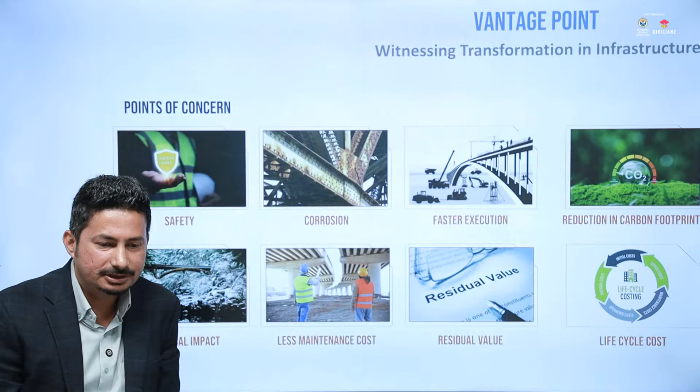So going ahead, as we speak, these are very interesting times where we are sitting at a vantage point, where there are a lot of developments happening. A lot of topics are being associated with infrastructure, such as how we can reduce the carbon footprints, what will be the life cycle costing of the project. We are talking about the residual value of the project.

We are talking about corrosion, faster execution, less maintenance. So all of these aspects put together are making infrastructure development right now very, very critical. And if you put all of these points together in a basket, there is always a solution in choosing the right metal, choosing the right material for construction of various parts of the infrastructure.

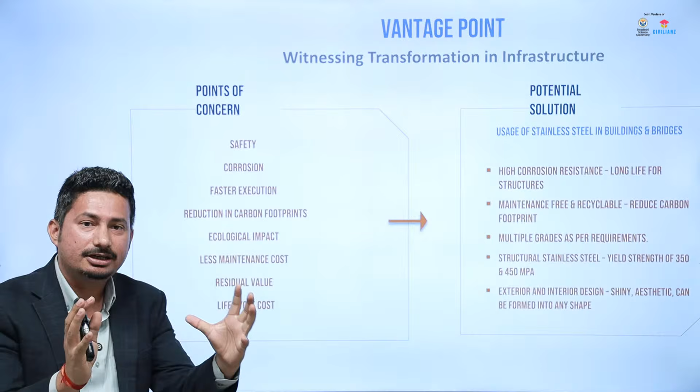So today we will be focusing a lot on the majority of the construction that takes place in infrastructure, in bridges, girders, etc. That is steel, and the same goes in buildings, etc. So we will talk a lot about how stainless steel can contribute to all of these points of concern that we have discussed.

So as we go ahead, as a designer, as an engineer, and a lot of people listening to us today are engineers, these are some of the main points you see on the screen before you choose any metal or any material for construction. First of all, you understand the strength of the material, the corrosion resistance, the fire resistance, and a lot of other aspects. Then the formability of the material, and then we decide the material for construction. So today in my talk we will talk about all of these points.

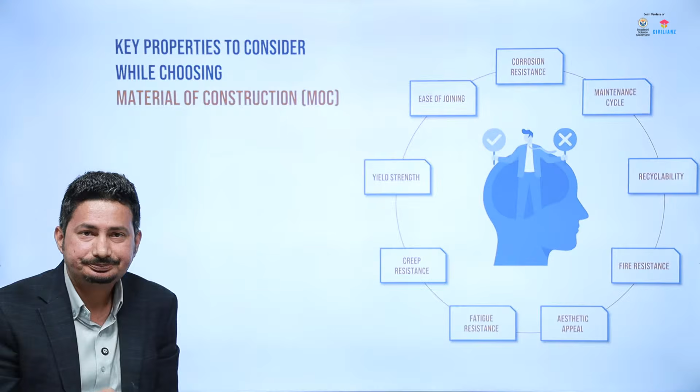First, addressing the corrosion resistance. That is one of the key challenges, as in India close to 5 to 7% of India's GDP is spent on corrosion maintenance, on maintaining the projects to resist corrosion. And even after that, there have been various incidents wherein failures have happened due to corrosion, which have not only caused financial losses but also resulted in loss of lives. With safety as a cornerstone, corrosion resistance is very, very important.

And there is a corrosion map of India. CECRI have given us a map which clearly defines the extreme severe zones and moderate zones. However, it has been focused only on the vicinity of the ocean. But there are various other criteria we have to focus on when we talk about corrosion. First of all, the vicinity to the ocean, that is one.

Then industrial pollution is causing a lot of corrosion problems across cities, even those away from the ocean. Wet and dry cycles, changing weather patterns, unplanned exposure to water due to floods, unpredictable rainfall. Then temperature fluctuations, even in hilly areas where wet and dry cycles are pretty often, corrosion happens quite prominently. So let's look at corrosion resistance from a holistic perspective and not just the vicinity of the ocean, and based on that, as engineers, we have to take a decision for selection of materials.

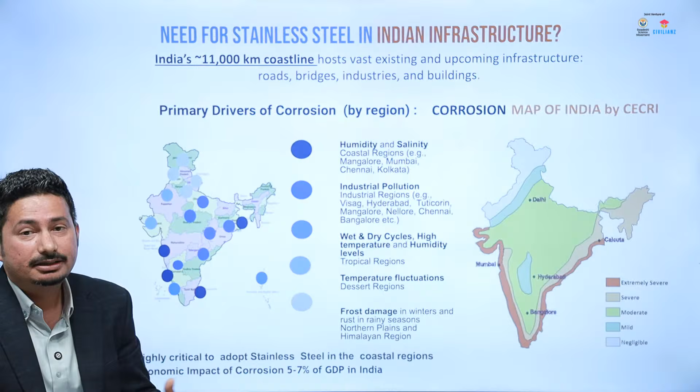Then, we are in Kerala. Kerala enjoys both. On one side, it enjoys a very vast coastline. On the other side, there are hills. It's a beautiful landscape. At the same time, it also calls for carefully choosing the material of construction, because of the vicinity of the ocean, as well as the hilly area's wet and dry cycles and temperature fluctuations.

Going forward, we talked about corrosion. Now, how does stainless steel per se provide corrosion resistance? It is very interesting to know that a minimum of 10.5% chromium should be there to call it stainless steel. At the molecular level, this chromium by nature creates a chromium oxide layer at the top, about 2 to 3 nanometers thick, a natural layer always created on top of any stainless steel product. Because the chromium is at a molecular level, when we cut it or machine it, this chromium oxide layer is automatically created again, always protecting the base material from the atmosphere. Therefore, it prevents corrosion.

Now, the same phenomenon in mild steel or any material other than stainless steel is achieved by artificially coating it with primer, top coat, metallization, etc. One thing to note is that this is artificially done, and all of these coats are sacrificial in nature. Therefore, maintenance is done periodically based on the location. After a few years, painting has to be done again, because that coating sacrifices itself to protect the material.

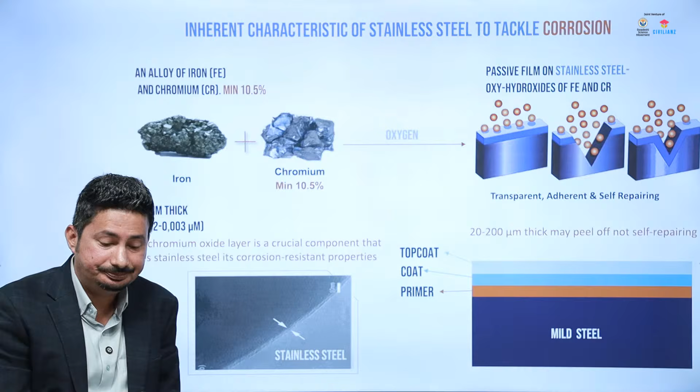For that matter, the grades and thicknesses which will be used will be more than 3 mm. 3 mm till 80 thicknesses are available in India now in multiple grades. We will talk about all these grades as we go ahead. And then there are various tubular sections which are available. Checkered plates in stainless steel for various walkways are available. Stainless steel rebars, and also built-up section girders and various forms which we can fabricate and provide. So we'll talk about all of these as we go ahead.

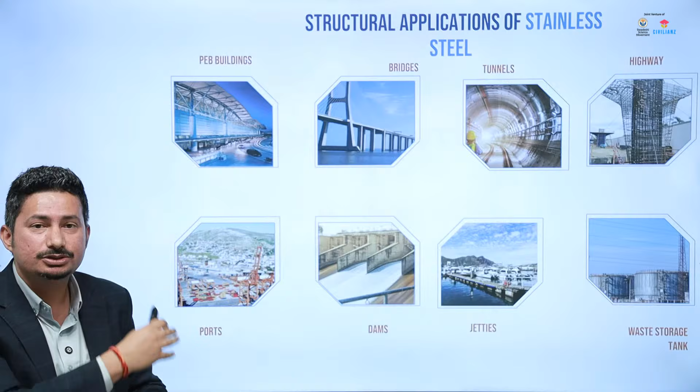So the application of these are in bridges, in buildings, in highways, ports, jetties. All of these different types of products are used in all of these applications, which are very prone to corrosion. Also, stainless steel is very prominently used for facade application, for exterior design, interior design, and as we go ahead, we'll talk about these applications as well today. Now, first, let's take the topic of rebar, which as civil engineers, it's very important to understand.

Now, before we get into the subject, let me take a case study. This case study is for the Progreso Pier. Progreso Pier is in Mexico. In that screen, if you will see, there are two jetties, two piers. The right hand side pier was built in 1941, and in 1941 stainless steel rebars were used. Then the other pier on the left hand side was built in 1969, and that pier did not have these

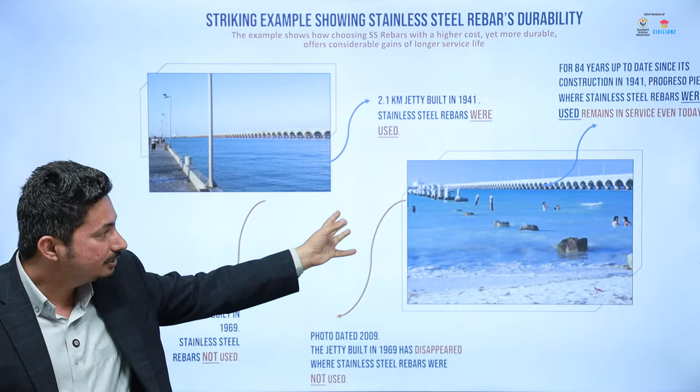stainless steel rebars. Now, these photos were taken in the 2009 time frame, and still the pier which used stainless steel rebar exists, still performing pretty well. And the pier which was constructed later, which did not use stainless steel rebar, vanished away. There has been a lot of research done on it, and ultimately what was found is that the usage of stainless steel rebar has really helped in increasing the longevity of the pier.

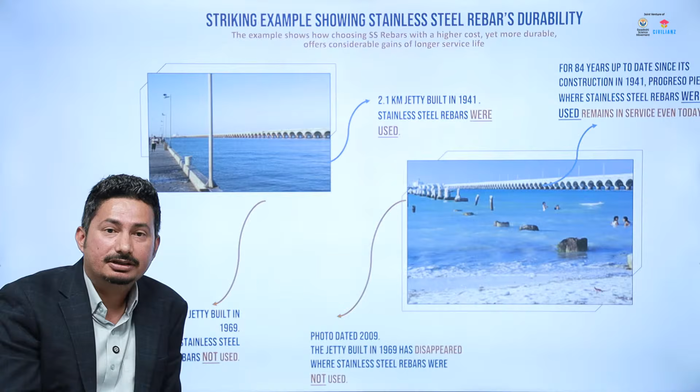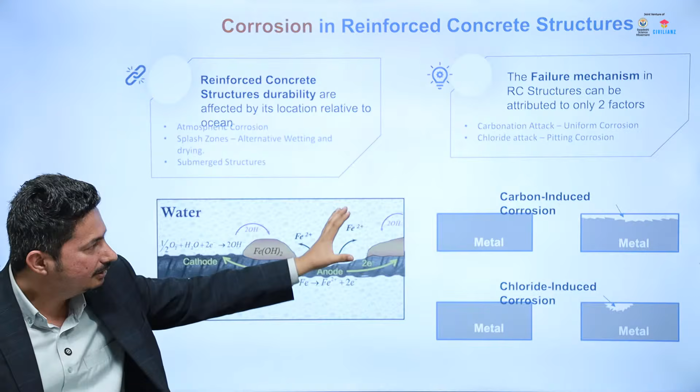Now, why did that happen? Because, as we will see in the upcoming slide also, after corrosion in rebar, the concrete will fall off. That action is not happening because the rebar will not corrode. Therefore, the longevity of civil structures really increases if we use stainless steel rebars. Now, let's take the kind of corrosion that happens in concrete. Primarily, carbon-induced corrosion and chloride-induced corrosion. The anode and cathode generation will happen, then material loss will happen, and therefore corrosion will happen. So, primarily, these are the two types: carbon-induced corrosion and chloride-induced corrosion.

Now, in the carbonation method, generally what happens is that with the formation of carbonic acid, the top surface every year, bit by bit, the carbonation of the concrete will happen, and mostly the first cover of the rebars will generally get affected because of the carbonation. This test is called the phenolphthalein test, in which the pink colored area you see is not carbonated yet, and the colorless area is carbonated already, and that happens with the age of the concrete.

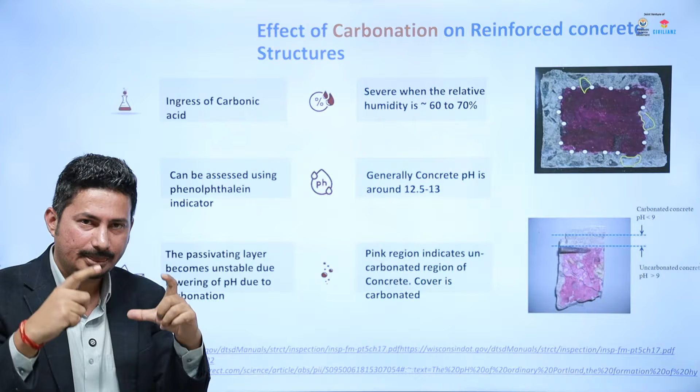And here the workmanship, the type of concrete that we are using, plays a very, very critical role to prevent carbonation. And also, to resolve that problem, we can use stainless steel rebars. Even if carbonation happens because of the circumstances where the project is located, this particular layer, the rebars, will not corrode by using stainless steel rebar.

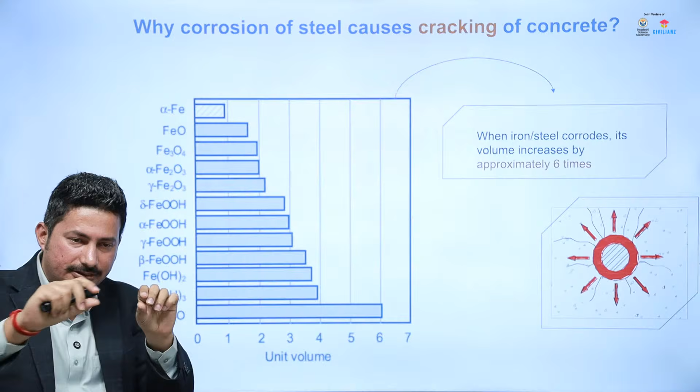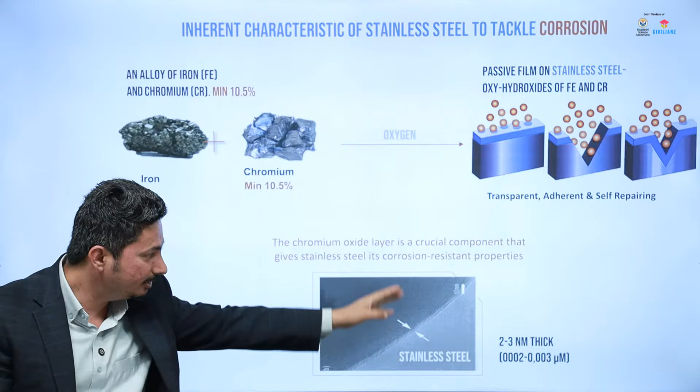Stainless steel will prevent corrosion by creating a boundary between the base material and the environment through a chromium oxide layer. This is the basic fundamental of corrosion prevention, and that's how it will help the structure as well. Looking at all this, an Indian standard has been formed, called IS 16651, primarily for structural stainless steel rebar.

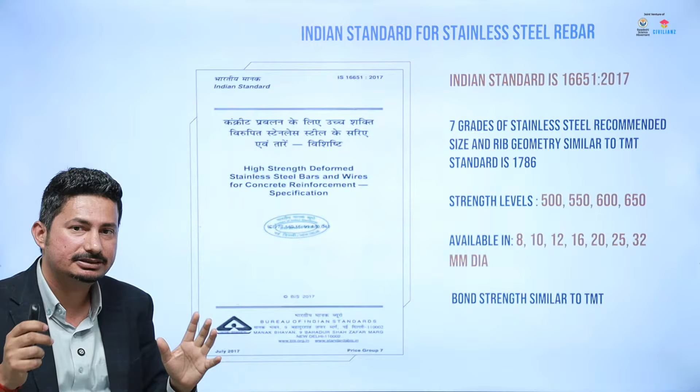In this, there are 7 grades of stainless steel which have been recommended. The strength levels of 500, 550, 600, 650, which are at par with TMT rebars, are provided. All diameters from 8 mm to 32 mm have been provided. So the BIS code is already in place where stainless steel rebar is incorporated. In these 7 grades, there is even the 410L, which is widely used in India right now.

Even in that, chromium is 11 to 13.5%. Remember, chromium creates the chromium oxide layer, so a minimum of 10.5% is required. In this, 11 to 13.5% is available, and it goes up to 22, 24% levels. Based on the vicinity and the corrosion resistance we need, we can choose which rebar material we should choose.

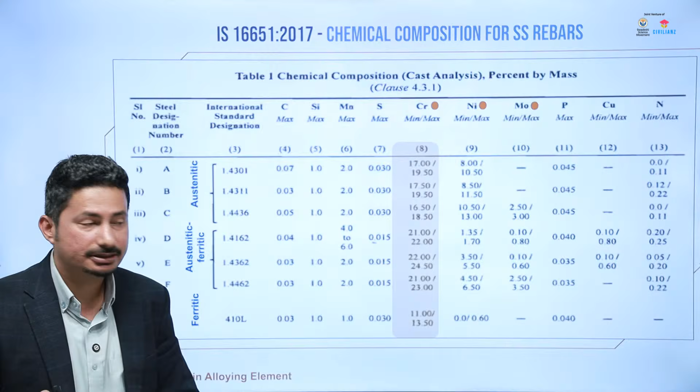At the same time, this standard also defines the different strength levels of stainless steel rebar. Remember, in TMT rebars, we have 500, 550, 600, 650 strengths. The same strengths are available in stainless steel rebar. Elongation of 14.5 with 550 is the most common combination being used. In addition, 650 and 500 with 16 and 10% elongation are also available.

So the question arises, how about compatibility with concrete? Compatibility with concrete depends on a couple of reasons. One reason is the rib structure. The rib structure of stainless steel rebars, as per the standard, is at par with existing TMT rebar, so the pull-out strength and everything is the same.

And there is one more misnomer, that stainless steel is always shiny. Stainless steel is not always shiny; the shine comes from a process. When stainless steel is hot rolled and comes from the mill, it is not shiny. It undergoes a process and then becomes shiny. So these rebars are not shiny handrail-type rebars. They are grayish, rough rebars. It looks just like TMT, only with a grayish tinge.

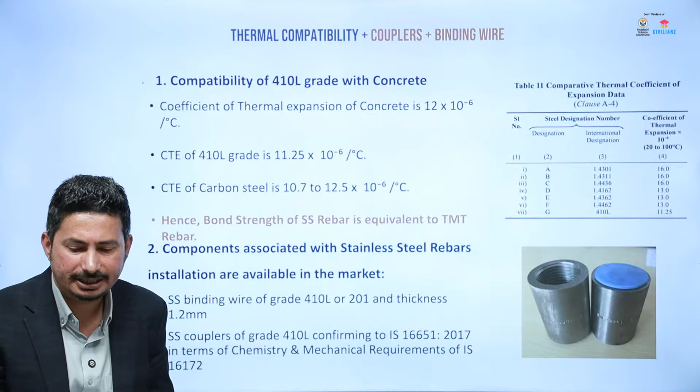Going forward, the acceptance of stainless steel rebar in the industry is rapidly increasing, and it has been in the market for quite some time. Since 2018 and 2019, there have been certain policies by railways to use stainless steel rebar. Local policies by various railway zones have also been created. The MoRTH has also come out with a policy in 2021 and again in 2024 to use stainless steel rebar for all coastal belt projects within 15 kilometers of the coastline, and railways say within 30 kilometers of the coastline stainless steel rebar may be used.

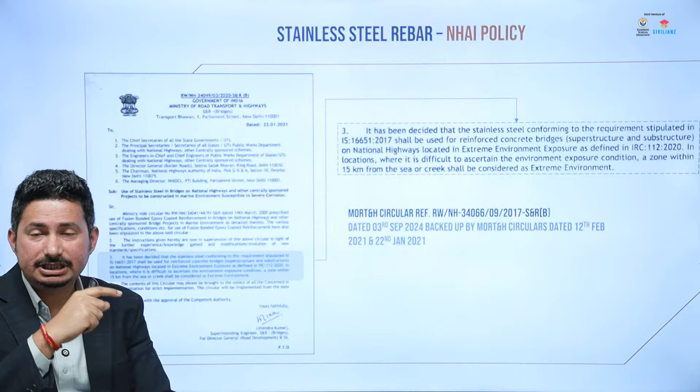And the MoRTH policy says within 15 kilometers of the coastline stainless steel rebar shall be used. So there are various policies in place, which also shows the acceptance of stainless steel rebar in the market, and people are benefiting from it.

There are various other options like coated rebars, TMT rebars, CRS rebars in the market. How does stainless steel rebar perform, and how can we compare? We have a couple of slides where we can understand how to compare stainless steel rebar with the other possible options. For example, first is coated rebar. The coated rebars are epoxy coated rebars and GI coated rebars.

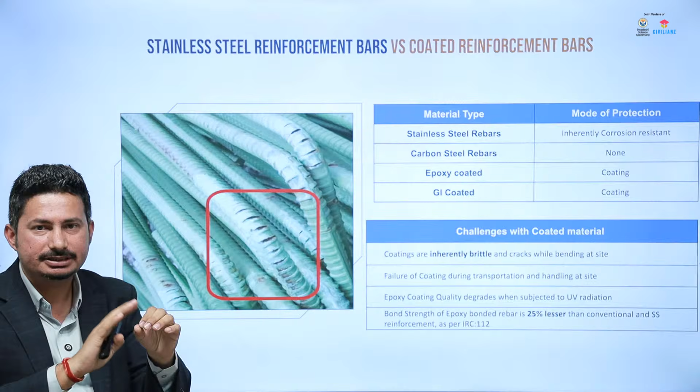We have to understand that all these coated rebars are made straight in the factory. The moment we bring them to the site, the first thing is we have to cut them. The moment we cut the rebars, the surface gets exposed. The second operation is bending. The moment we bend them, cracks will develop because the coating will crack. Therefore, the efficacy of coatings will not be better. And with cracks developing in the coating, accelerated corrosion happens in these concentrated areas, which is even worse than uniform corrosion.

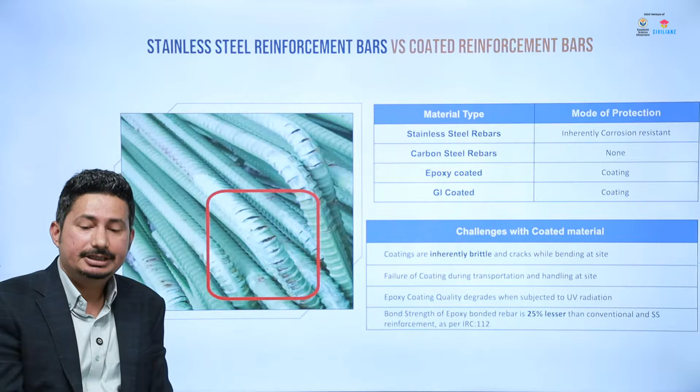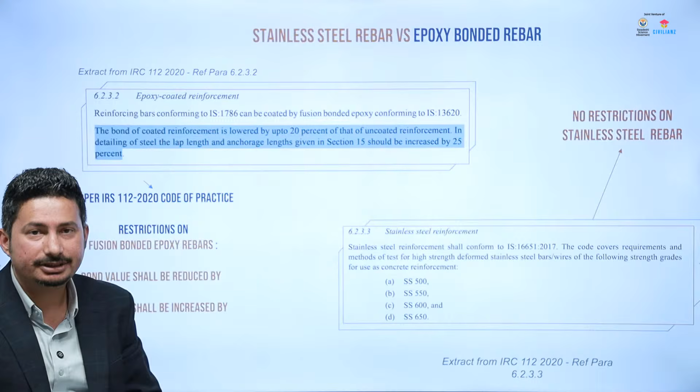If we understand from the IRC 112 conditions, it very clearly states that the strength levels, the bond strength levels, and the lap value have to be increased when we are going for epoxy coated rebars. So that also shows extra material will be used if you are going for epoxy coated rebars. For stainless steel rebar and TMT rebar, such conditions are not in place.

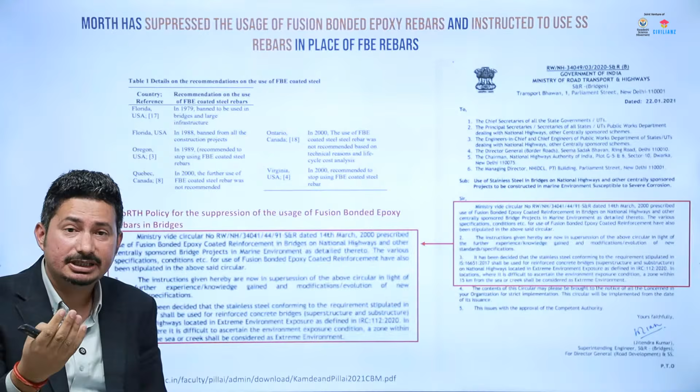Talking about various countries, many have already started moving away from epoxy coated rebars for certain applications, primarily because of these reasons. The coating breaks at site. Then we also have to increase the material requirement because the bond strength will not be as per TMT or as per stainless steel rebars.

Looking at it even more, the Ministry of Road Transport and Highways has also released certain policies where they have mentioned that epoxy coated rebar usage shall be suppressed and limited. So these are some of the comparisons.

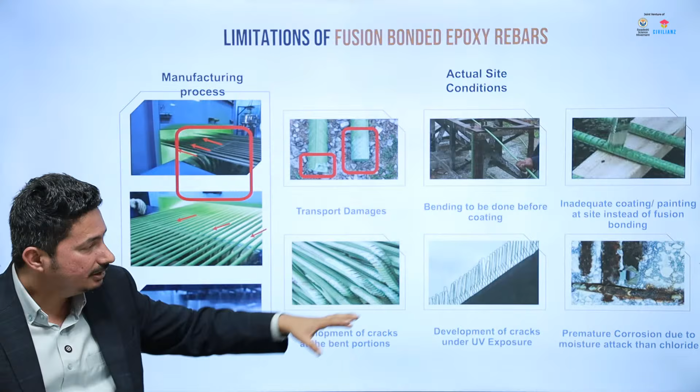This is one photograph showing how epoxy coated rebars are made. Once we cut them at site, these sides will be exposed. Then we bend it, and after bending, this is how it looks. So there are various reasons why this is a comparison with respect to epoxy coated rebar.

As we discussed in the previous slides, when we talk about stainless steel rebar, minimum 10.5% chromium should be there. So the chemistry itself is so different that CRS rebar has only 0.4% of corrosion resistant element, and chromium in it is mostly 0.02% or so. Because of this, the real efficacy against corrosion may not happen due to the very limited chemical corrosion resistant element present. Whereas in stainless steel rebar, minimum 11 to 13.5% chromium is present, so obviously the corrosion resistance capability of stainless steel rebar is much higher than CRS rebar.

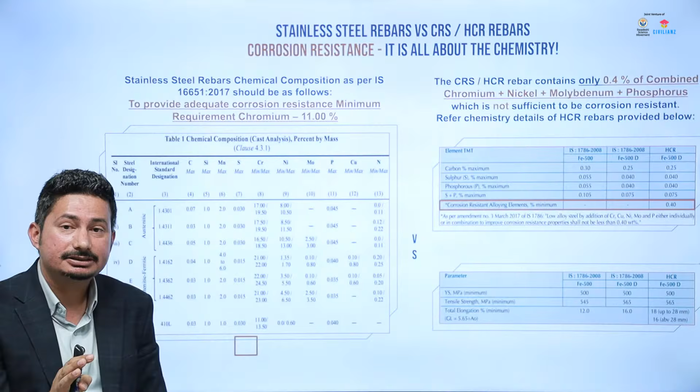So generally consultants have this notion that when corrosion resistance is a criteria to choose a rebar, most consultants go for stainless steel rebar.

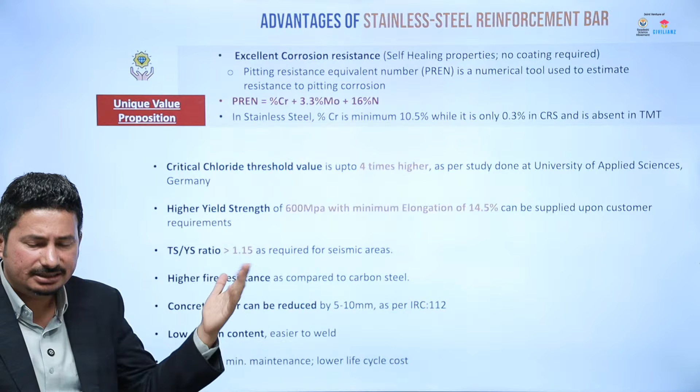There are various benefits of using stainless steel rebars. For example, IRC 112 says we can reduce the concrete cover by 5 mm, among various other reasons discussed in the slides above. This is IRC 112, which clearly says 5 mm of concrete cover can be reduced if you are going for stainless steel rebar.

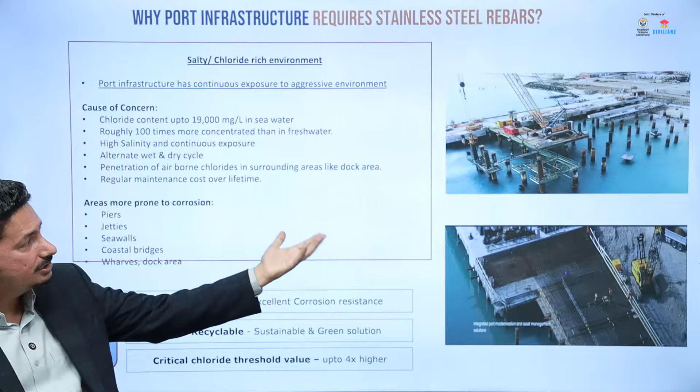Now talking about some applications, first is port structures. Port structures, as we all know, are highly exposed to the marine environment, and chloride-induced corrosion is very prevalent there. Therefore, using stainless steel rebar makes a lot of sense. The PREN value, the pitting resistance equivalent number of the rebars, is much higher compared to CRS or TMT rebars, as discussed in the previous slides. So the structures will last longer if using stainless steel rebars.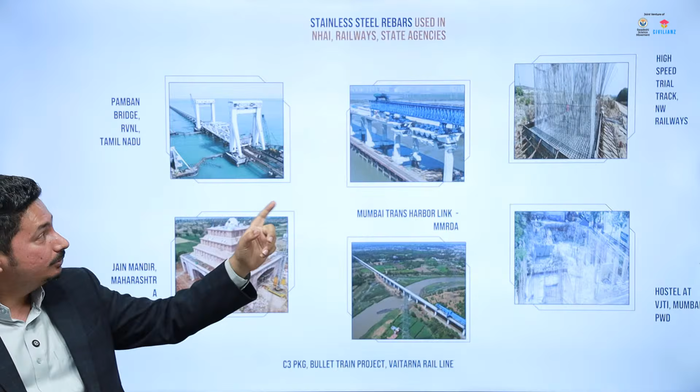A couple of examples: in Pamban Bridge, stainless steel rebars have been used. In Mumbai Trans Harbour Link, it has been used. In bullet trains and high-speed rail tracks, stainless steel rebars are being used. Not just on bridge projects, but also in infrastructure like hostels, mandirs, and buildings, stainless steel rebars are being widely used.

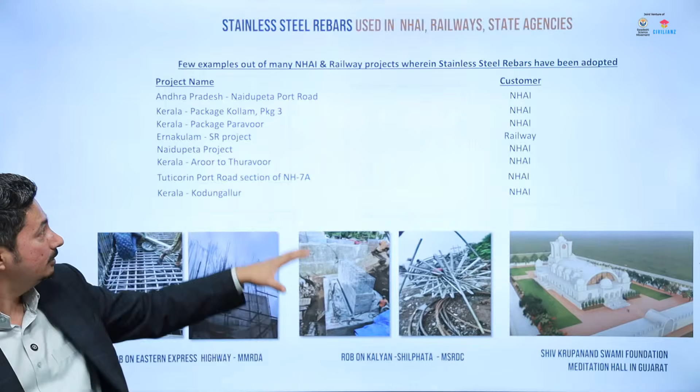Some more examples: in Kerala, where we are sitting, there are a lot of projects already using stainless steel rebars. That's a very good sign, and it shows that these projects are getting benefited by using this.

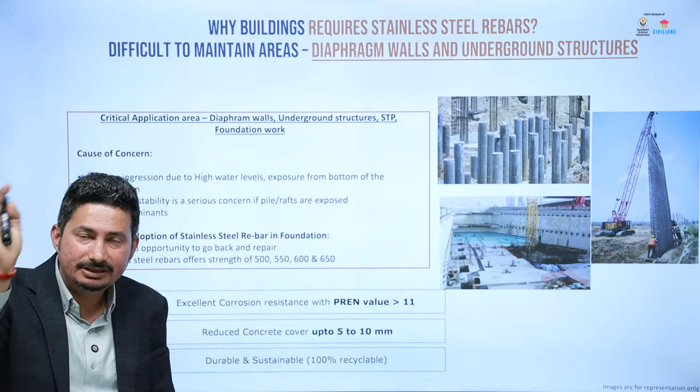Now talking about buildings, there is one important aspect. In buildings, we can always see diaphragm wall and retaining wall structures, and even walls exposed to pollution—in all these places, stainless steel rebar can be used.

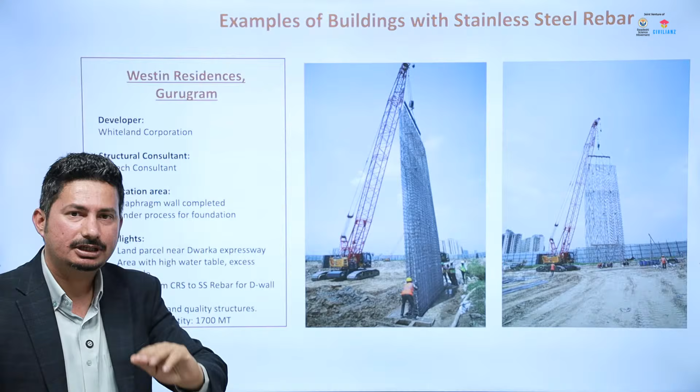So this is one example where diaphragm walls or retaining walls of a building are using stainless steel rebar. Based on studies, earlier CRS rebar was being used, but because of high underground water level, and because it's highly corrosive being near a polluted lake, CRS was not performing well since it has very limited chemistry. Therefore, builders have now moved to stainless steel rebars and are benefiting from the same.

There are various other examples. Now let's move ahead, we have other topics to cover. Let's talk about usage of - so far we have discussed rebars, now let's move toward plates.

Plates are used in bridges and in buildings. Plates can be transformed into various shapes - we can make built up sections, provide checkered plates, or roll them into pipes and tubular sections. All of these plates can be used for girders, for building applications, for bridge applications, etc.

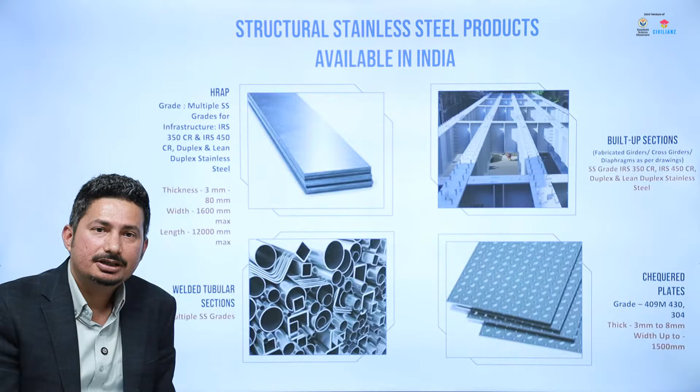It may cost a little higher, but over the life cycle of the project, the maintenance cost drastically comes down. So here comes into picture the life cycle costing of the project - when we look from that aspect, stainless steel provides much better solutions.

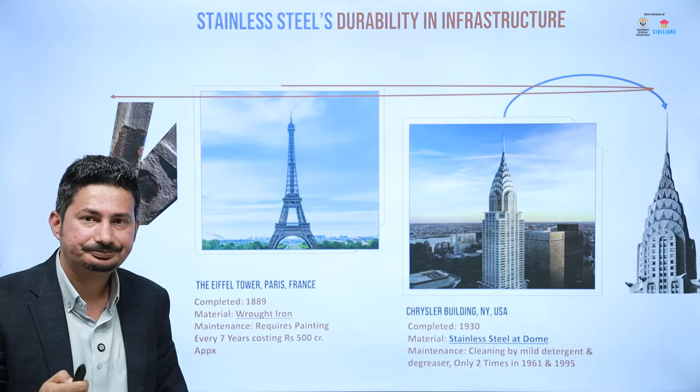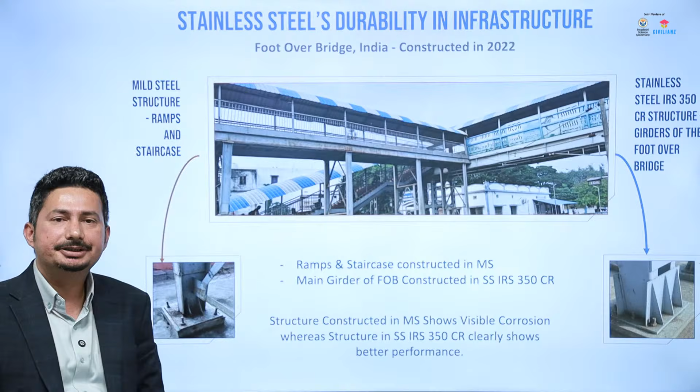We talked about this - mainly chromium provides corrosion resistance, and we'll talk about these applications as we go ahead. Now let's talk about a very important topic: the various grades available in stainless steel. Mostly there are three families of stainless steel used for infrastructure applications.

One is the ferritic family, called grade 400 series. Grade 400 series interestingly has high strength levels - yield strength can be 350 MPa and 450 MPa, and these can be used for making girders, buildings, beams, columns. At the same time, the cost of ferritic grades is much lower compared to other grades. Then comes the duplex.

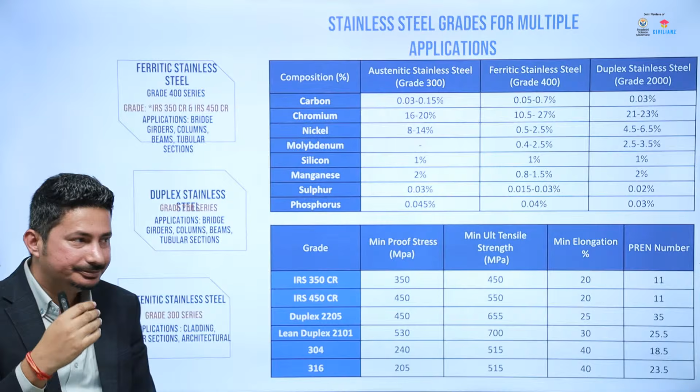Duplex is the highest category of stainless steel in terms of infrastructure. It has very rich chemistry, so it can be exposed to the ocean and nothing will happen to it. It also has very high yield strength and tensile strength, so it can be used for all structural applications. Then there are the commonly known austenitic grades, 304 and 316.

These are mostly used for aesthetic applications because the yield strength is about 205 MPa. Because of that, they cannot be used for structural applications, whereas IRS 350 CR and IRS 450 CR are used for structural applications.

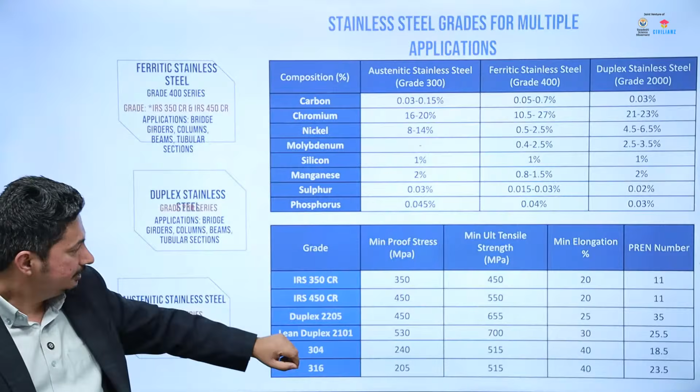There is also an interesting story about how the IRS 350 CR nomenclature came into being. IRS 350 CR means Indian Railway Standard - 350 is the yield strength, CR is the corrosion resistance. This was primarily designed for Indian Railways. In the 2015-16 timeframe, Indian Railways wanted to develop a stainless steel grade for structural application.

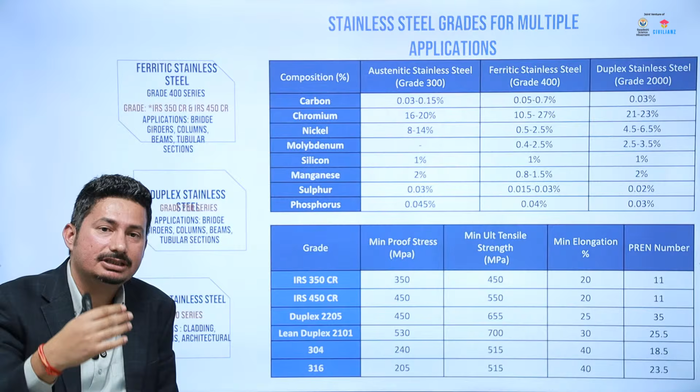There is a standard called ASTM A1010, globally recognized for stainless steel used in infrastructure with high strength. In India, it was developed by the Indian Stainless Steel Development Association, and so the IRS 350 CR came into being. Now it is being widely used by railways as well as non-railways - various municipal corporations, state highway departments - everyone has started using these.

Now, talking about corrosion resistance, there was a study done in South Africa where, across multiple locations, multiple types of materials were kept for testing.

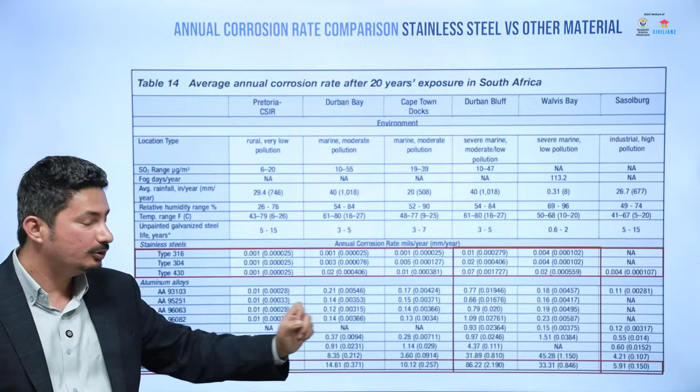Now, they saw annual corrosion rates in mils per year and millimeters per year. These three columns are stainless steel, and the last one is mild steel. If we compare, for example, severe marine and moderate low pollution in 430 grade stainless steel, it was 0.07 mils per year, whereas mild steel was 86.22 mils per year corrosion rate. That clearly defines the difference in corrosion. If you go for mild steel, it is multi-fold higher corrosion compared to stainless steel.

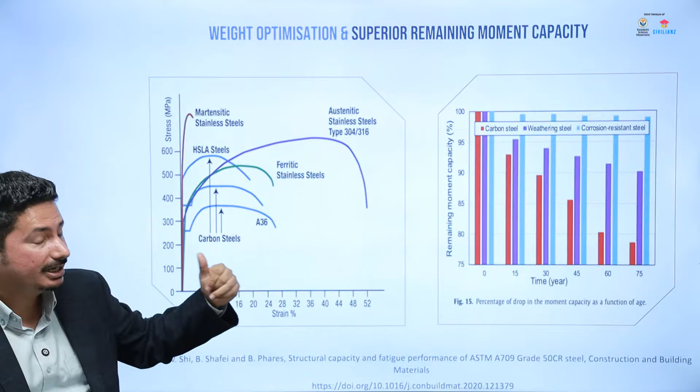Both on the stress strain curve as well as the remaining moment capacity, the stainless steel performs pretty well, and therefore in all seismic grade materials and seismic structures, using stainless steel makes more sense because of its higher ductility in nature.

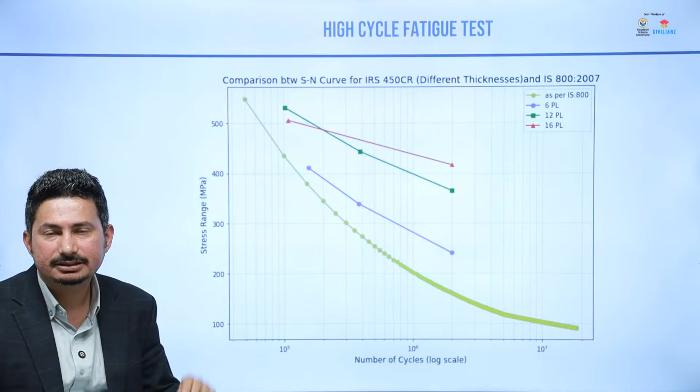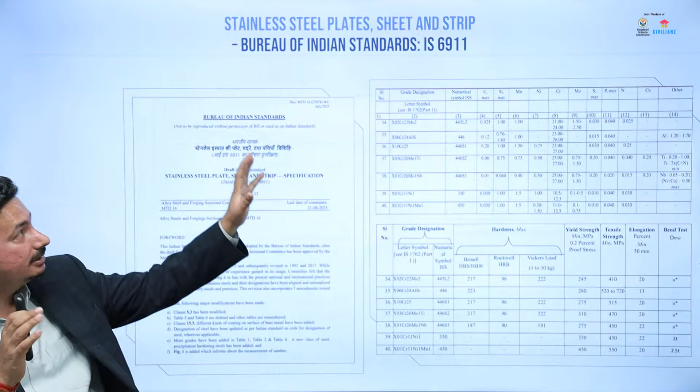Even IS 6911, which is the stainless steel standard, all these stainless steel grades which have to be selected are part of it. Even this high strength stainless steel has been incorporated in 6911, which can be used by the engineers.

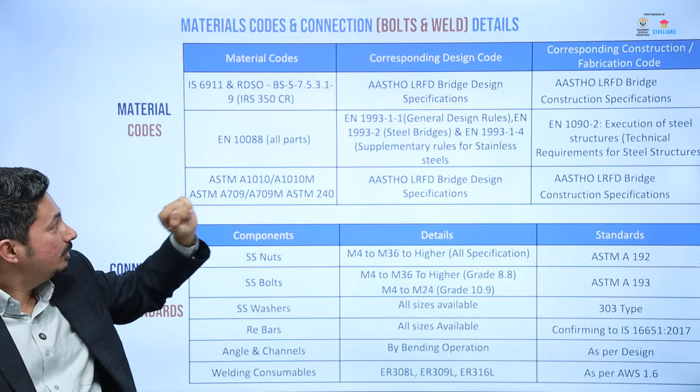Material code: Indian Railways has developed a material code of RDSO BS-S-7.5.3.1-9, and IS 6911 we discussed. Also, EN codes and ASTM codes are very well available for designing structures in stainless steel. Even IS 800 allows designing in stainless steel, and there is one more revision coming up for IS 800 where a new chapter for stainless steel will also be incorporated soon.

Then there are nuts and bolts and welding consumables. All of these standard nuts, bolts, and welding consumables are available in the Indian market and being widely used across.

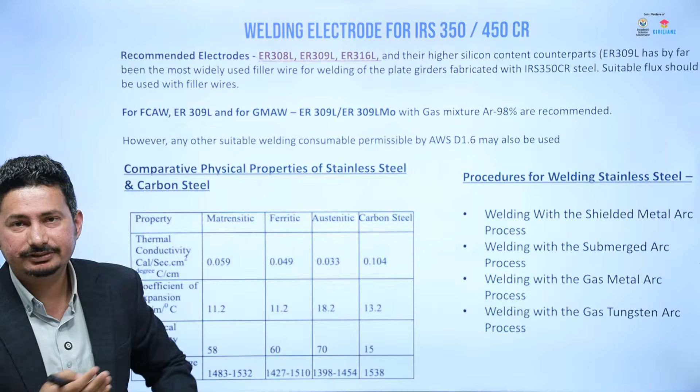When it comes to welding, generally we ask this question: if we are going for welding stainless steel, will it be very different? It's not very different. The same machine can be used, the same manpower can be used. Only the electrode changes. For example, to weld stainless steel, the grades of electrodes are 308L, 309L, and 316L, based on the different grades of stainless steel we use. The most commonly used welding electrode is 309L, and the same welding procedures will be used. Only heat input has to be controlled, and with minor training, the same person can weld using the same welding machines.

When we talk about infrastructure and structural applications, we are talking about high strength stainless steel grades. These examples are from IRS 350CR and IRS 450CR, which is a ferritic stainless steel grade having a yield strength of 350 MPa and 450 MPa. For example, all these footover bridges are made up of IRS 350CR stainless steel grade, and the structure between Vivekananda Rock and the Thiruvalluvar statue at Kanyakumari is made up of IRS 450CR.

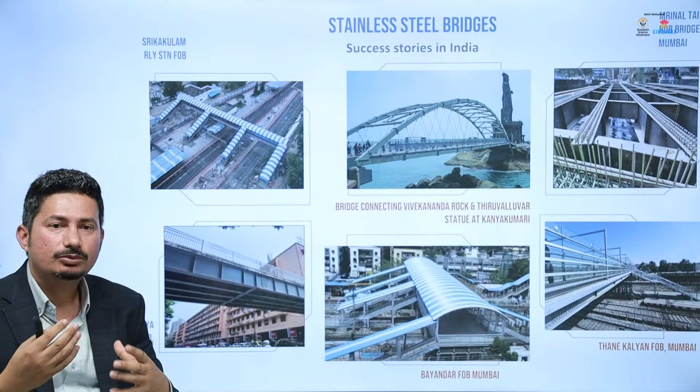Then that bridge at Mumbai, called Mrinal Tai FOB, is built from duplex stainless steel grade. So based on the location, we choose what kind of stainless steel has to be used, and what kind of strength requirements. As discussed in the first slide, multiple parameters decide, and then we choose the grade.

This is one of the iconic projects happening in India where these pylons are being made up of stainless steel. Here, IRS 450CR grade and IRS 350CR grade have been used for making the complete pylon.

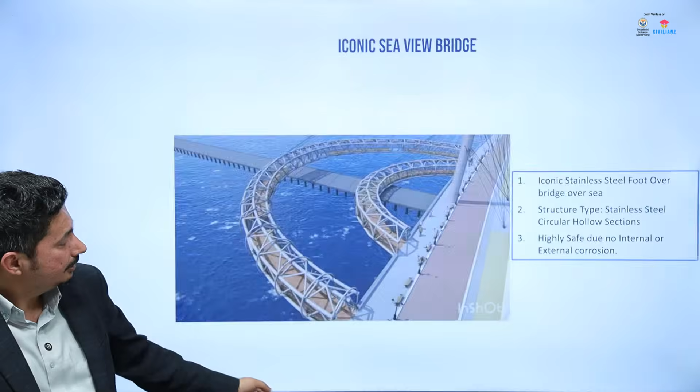It is all bolted in nature. Now, bolted bridges are becoming the first choice of clients, because first, it increases the speed of construction, as all these modular structures come at site and get bolted, so there is no site welding. There is a lacuna of site welding in that it affects the quality—at site, if something is getting welded, it results in bad quality. So both aspects, quality as well as faster execution, are being achieved by using all these bolted structures.

In this particular case, the highway department was asked to increase the navigation height to 4 meter. Now, if we go for a concrete bridge, the concrete bridge girder depth will be easily 2.5, 2.7 meter. If we have to maintain that and also provide the navigation at 4 meter, obviously we'll have to lift this entire girder up. And when we are lifting the entire girder up, then we have to provide the approach spans. Approach spans call for the land acquisition cost.

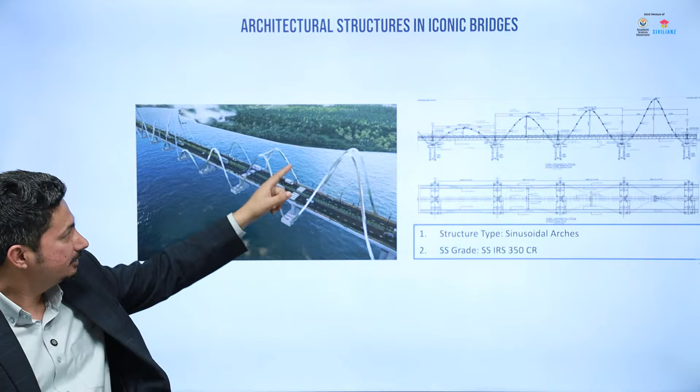Now going ahead, various architectural usage of the IRS 350 CR grade is also happening for big structures. For example, this is a bridge where this architectural sinusoidal wave-like structure is now being made up of IRS 350 CR.

The original choice was MS, mild steel, but then when it was noticed that all these rivers are getting polluted, and the maintenance will become a challenge during the life cycle of the bridge, then the consultant and the end clients moved toward IRS 350 CR.

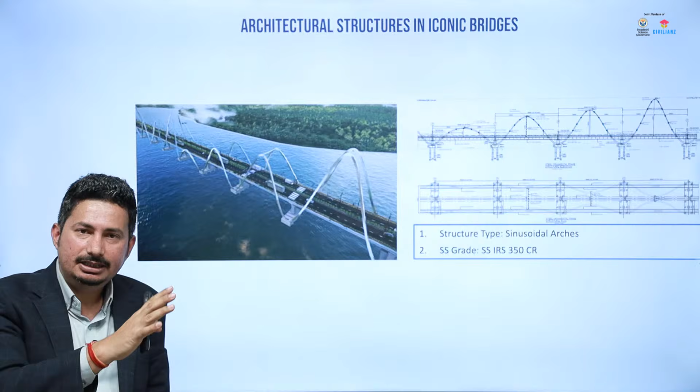Now the topmost structure is about 30-meter tall, so all of these areas will obviously become a challenge to maintain. Therefore, usage of structural stainless steel for this application is becoming more and more common from the maintenance aspect. So it provides you the aesthetic appeal, as well as it reduces the maintenance requirement.

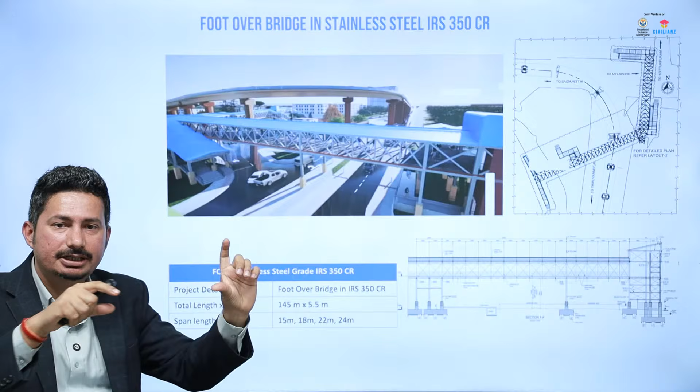Now when we talk about footover bridges, various footover bridges within the cities are coming up like these. And all these tubular sections are being produced in IRS 350 CR stainless steel grades. And with that, all these truss structures are being made in footover bridges across cities, and various footover bridges have been constructed like this.

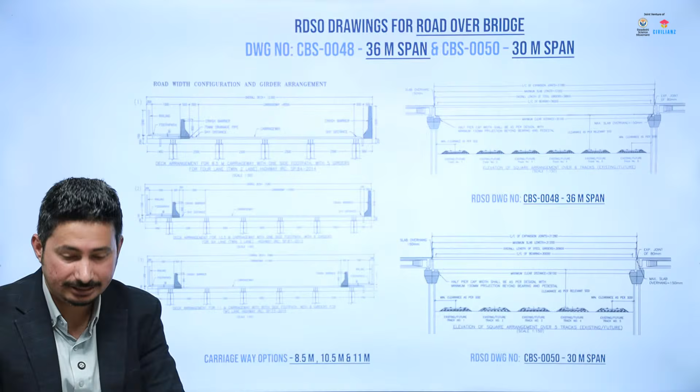RDSO has already released the standard drawings for road over bridges. In 36-meter and 30-meter span, RDSO has already released the material standard, as well as the drawings of the road over bridge stainless steel girders. Then talking about footover bridges, RDSO's footover bridge standard drawings are these. You can make a note of it, which is being widely used across Indian Railways now.

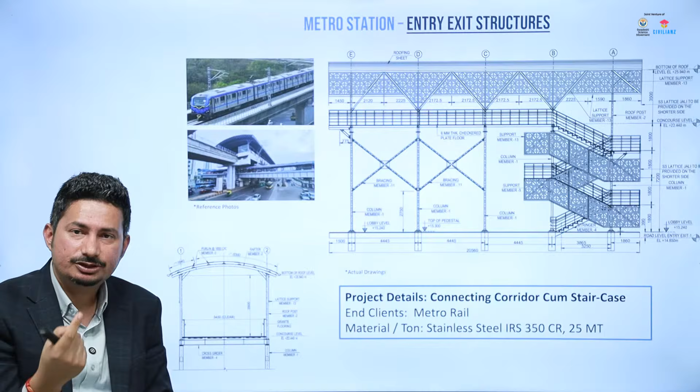Even metro entry exit structures for all the metro stations are also slowly getting built in IRS 350CR stainless steel grade, for two critical reasons. First, the execution is much faster when we compare to concrete. Bringing the concrete together and putting it together takes a lot of time. Making it in stainless steel IRS 350CR is much faster, and the longevity of the structure will be much higher.

Another reason: within cities now water venting height is being increased because in various cities like Chennai, even in Kerala, because of heavy rain, flooding happens, and in all of these cities the old network of drainage and nalas is there. Now all these old bridges are concrete bridges. The water level increases because of flood. The water doesn't vent out properly because of the greater depth of these concrete bridges, and because of that there is a need to rethink the bridge structure for all of these nalas.

And one such development is that semi through girder bridges have been designed in stainless steel IRS 450CR, and across cities now these are being executed, which reduces the depth of the overall bridge to only 775 mm instead of concrete girders which are about 1.5, 1.7 meter depth. Because of this, the water venting height is becoming better, and at the same time there is no need to provide approach spans in densely populated areas. So this is one critical solution for a very important problem within the cities.

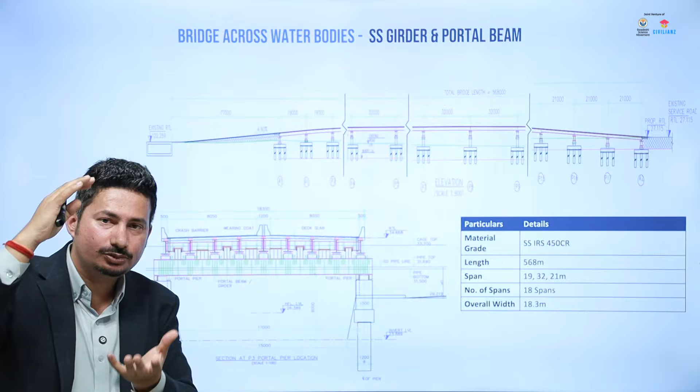Now, one more as a structural engineer, you will appreciate. Generally, what happens? All these bridges, composite bridges, only the girders are made up of steel or stainless steel. Now, in one such project, the girders are also composite, made up of stainless steel IRS 450CR, as well as the portal beam is made up of stainless steel. Now, what has happened is because of all this, the superstructure weight has reduced drastically. Now, when you reduce the superstructure weight drastically, first your execution time is reduced drastically.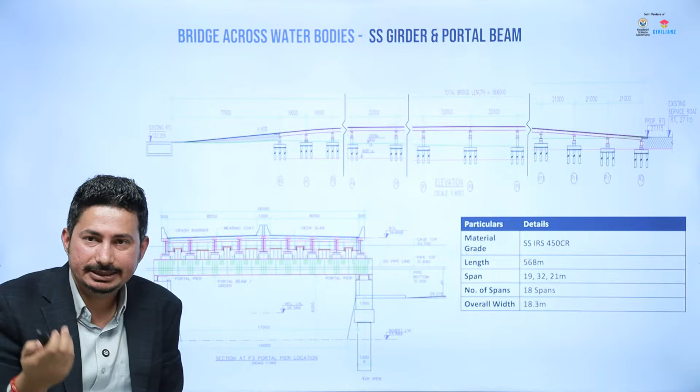Second is the piers become leaner. Even the benefit is felt for the piers and piling as well. So leaner superstructure, lighter superstructure will always result in leaner and lighter substructure as well. This is also becoming more and more important. So as designers, as engineers, you should also think about designing such bridges where the superstructure is much lighter.

So application of bridges we discussed. Now in buildings and statues, stainless steel is being used quite rampantly. For example, in the statue of Bhimrao Ambedkar, the core structure is made up of stainless steel, again because of the longevity aspect. On the Statue of Unity also, stainless steel rebar has been used. Amar Jyoti Stupam in Telangana, as well as in the building for New India Insurance in Chennai, the diagonal structure is made up of stainless steel.

Similarly, we talked about bridges. In buildings, we will talk about all these columns, beams, purlins. All of these can be transformed to stainless steel to increase the life. So structures along the port, which need longer life, can be made from that.

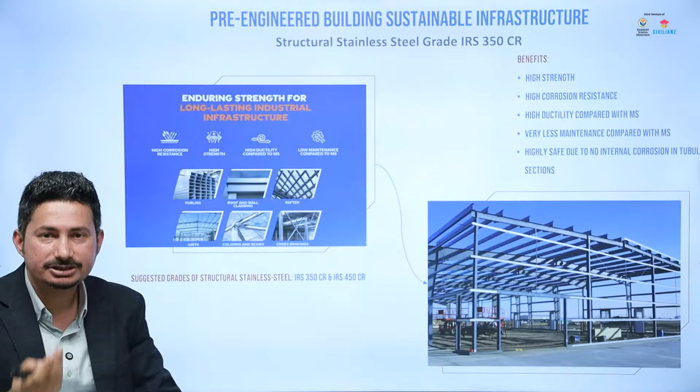Now, one critical aspect that we have to see is the corrosion that happens within the tubular structure. Within the tubular structure, there is corrosion because sometimes water seepage happens, and a lot of accidents. For example, in Delhi, at the airport, the beam collapsed because of the internal corrosion. Now, in stainless steel, that is one key benefit, that the internal corrosion will not happen. The structure will automatically become safer. So we talked about the application.

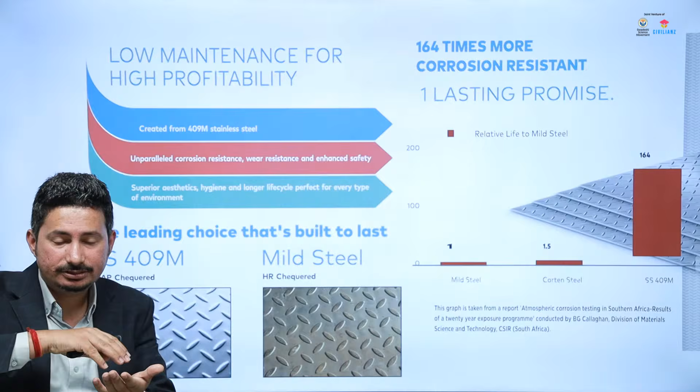Then let's talk about checkered plates. Various grades of checkered plates are available, which can again increase the life. Now one critical application is for railway bridges. In railway bridges now, stainless steel checkered plates of 409M and 430 are being widely used. What's happening there is all of these inspection platforms for railways and walkways are in remote places, so maintenance may not happen very often, and it always becomes a safety hazard.

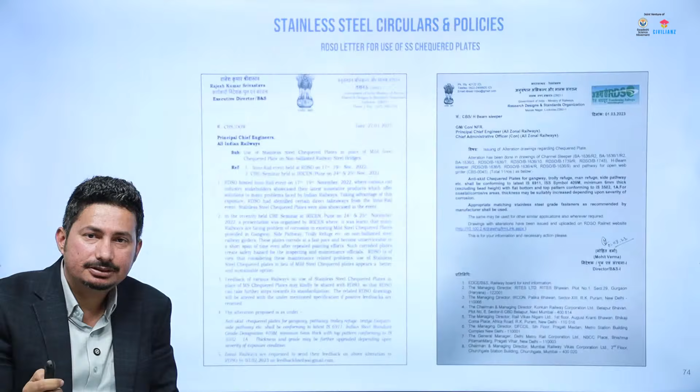Because of that, the railway has moved towards usage of stainless steel checker plates across India, and they are benefiting a lot from that. The thickness earlier for MS was 8 mm. Now in stainless steel it is only 6 mm. So these are the policies and various applications for railway bridges, for walkways; all across we can use checker plates. Even for the trucks which carry various types of transportation, we can use checker plates.

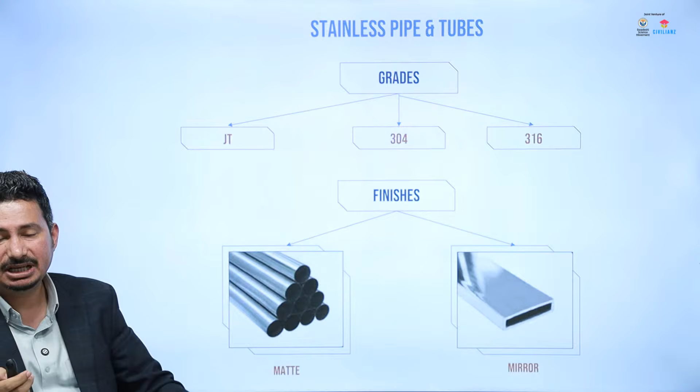Now pipe and tube, there are multiple grades of pipes and tubes available, 316, JT, 316, 304. The finishes are matte finish and mirror finish, which are available in the market. Then there is always a gap in the market to identify the quality of the product, which quality has been used. For that, various marking systems are being used. For example, the grade of the material, who is the make, who is the supplier of raw material, everything put together, a mark is put on the tubes.

And one such example is in Chennai, one of the stations has used it, and all of these numbers, all of these marks can be easily identified online. So it's very easy for the end customer to see whether the material received is authentic or not. That is one of the quality gaps in the market, which is being bridged by all this marking. One such marking is called Jindal Saathi Seal.

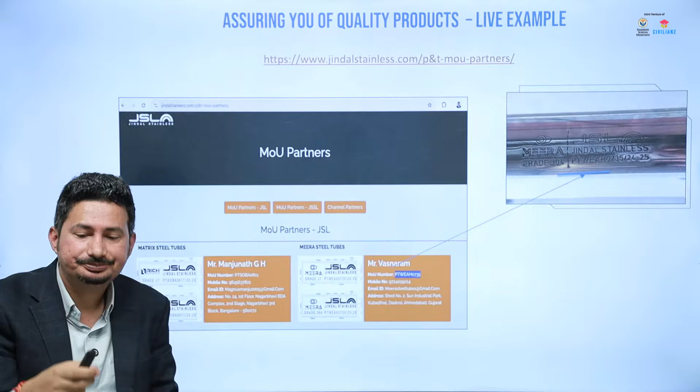So going forward, yeah, I'll now be quick on this.

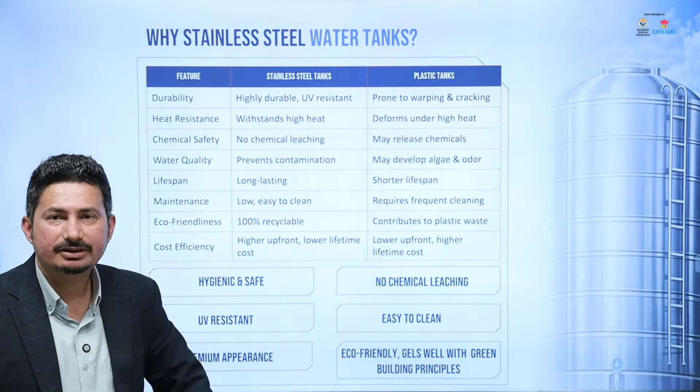There are water tank options available in stainless steel, which are being widely used for household applications now, and also mega 300 kiloliter and 500 kiloliter tanks are available in stainless steel. The grades are 304 and 316.

Now the key benefit of using stainless steel is, if you are going for a concrete tank of such a big structure, the algae formation inside is a health hazard, and maintenance and cleaning is required. Whereas in food grade stainless steel, there is no requirement of maintenance. So that's one primary reason. Health hazard is a reason. There is no chemical leaching because of heat.

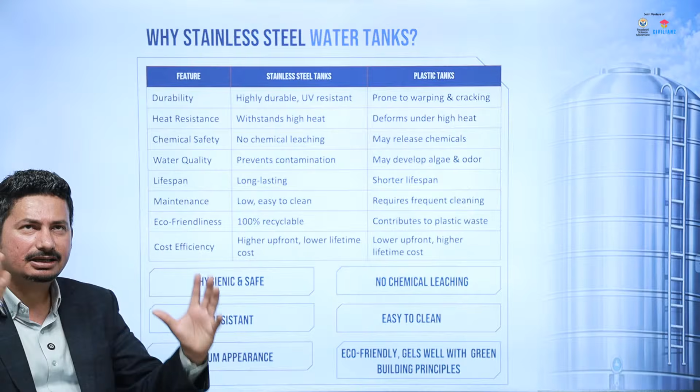In the plastic tank, there is a chemical leaching that happens. In stainless steel, that will not happen. And it is a lightweight structure. The whole structure will weigh about 1/10th the weight of the concrete. So all of these benefits are there when we are going for the stainless steel tanks.

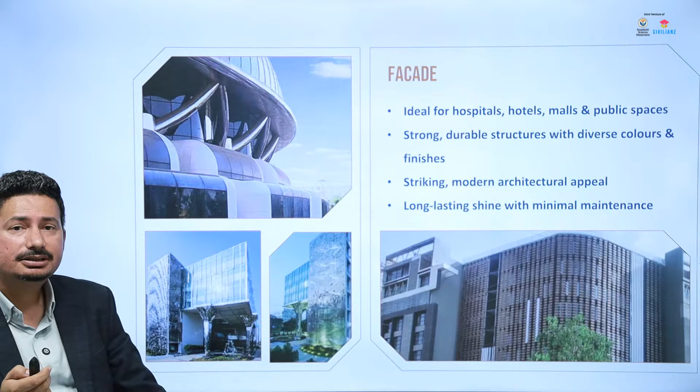Then there are various claddings available. Then various facade applications in stainless steel which are being widely used. So our architects in the audience today will appreciate it. Then canopies.

And for the interior designers also, there are various options available in stainless steel for planters, tables, wall dividers, escalators, elevators. So these are non-structural applications, but I just thought to show you various gates.

Now coming to the summary slides, the one topic that we have discussed throughout, from the starting, was life cycle costing. So let's define life cycle costing. When you start the project, there's an initial cost, and throughout the life, we incur costs in maintenance and repair. Sometimes we redo the complete project. So that's all the life cycle cost that we incur for the project.

Now, the Ministry of Finance has come out with a circular that for all the DPRs, the consultants, the engineers and the end clients can always consider life cycle costing when they are deciding about the costing of the project. Based on this, various projects are using better material. So only initial cost will not be a criteria. A person can always think about the life cycle costing, and based on that the decision can be taken.

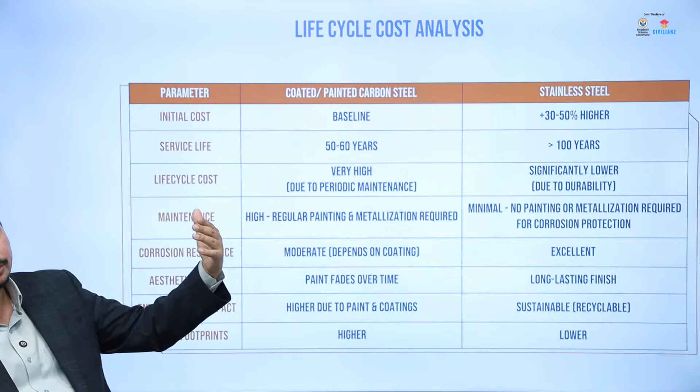In a nutshell, stainless steel compared to mild steel will always be 30 to 50% higher in cost, but the life will be more than 100 years. Because of the maintenance requirement, the life cycle costing will be significantly lower. It will last long, right? And there is no metallization requirement, no painting requirement. And it is sustainable.

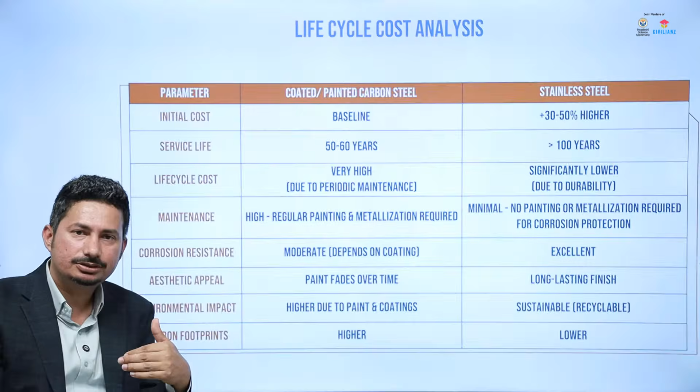The end of life value is much higher, because if we are making something in stainless steel today, by the time the project ends, the end of life value will be much higher compared to today, because raw material prices always go up. So all of these benefits are there in life cycle costing.

So with that, I'll summarize and close my talk. For any questions, please let us know. Thank you.